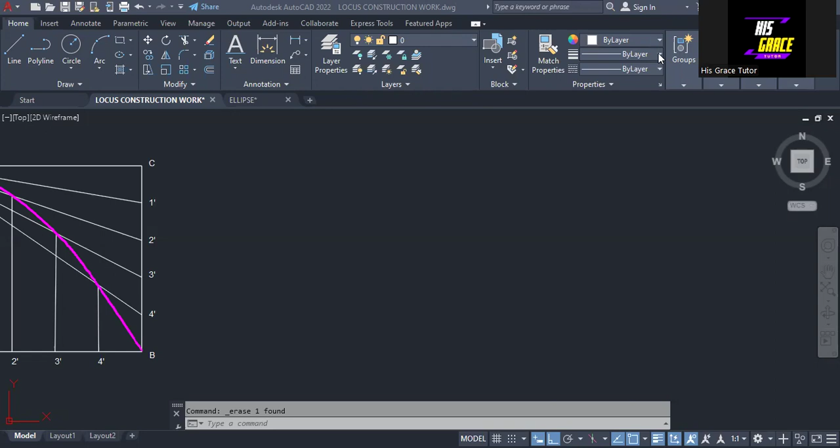The question says line AB is 140 millimeters. C is the bisecting point on line AB. At C, construct angle DCB equals 120 degrees, where point D is 70 millimeters from C. Join point D and point B together using a parabolic curve. So that is what the question says.

So we are going to work that out right now. The first thing we are going to do is draw a horizontal line 140 millimeters as AB. You just need to click on line, or type line on the command line, then press enter. So I'll just type line on the keyboard, then enter.

So what you need to do now is specify the first point as instructed on the command line. I'll click here, then type 140, then enter. So that's the line. We are going to label this line as line AB.

But before we go on, I want to locate the midpoint, since we are told that point C is the midpoint of line AB. So let's locate the midpoint. I will repeat line, so then I can get this midpoint now.

So I just draw a short line here, and then I will label point C. I'm going to be labeling the point, so I will copy from here. Select B, or C, whichever one you like, then copy selection. I will come here now.

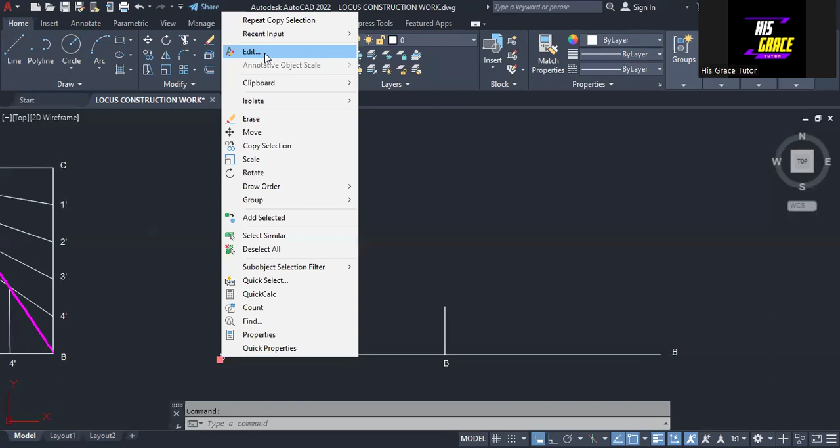So I'm going to change this to the right letters. Here is letter A. So we have B there. I just need to change this one to letter C. So that's the midpoint, and we have labeled the line.

Next we are going to draw a line CD, which should be 70 millimeters. Remember that line AC and BC are each equal to 70 millimeters, because we divided line AB, which is 140 millimeters, into two equal parts, as we located point C as the midpoint of line AB.

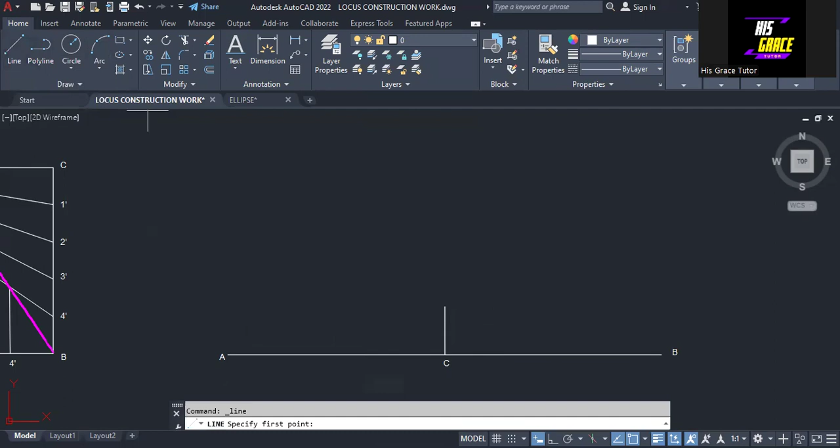For line CD now, I will select line, then click on this point. I'm going to get angle 120, so just look at the angle that we have here. This angle is 120 degrees.

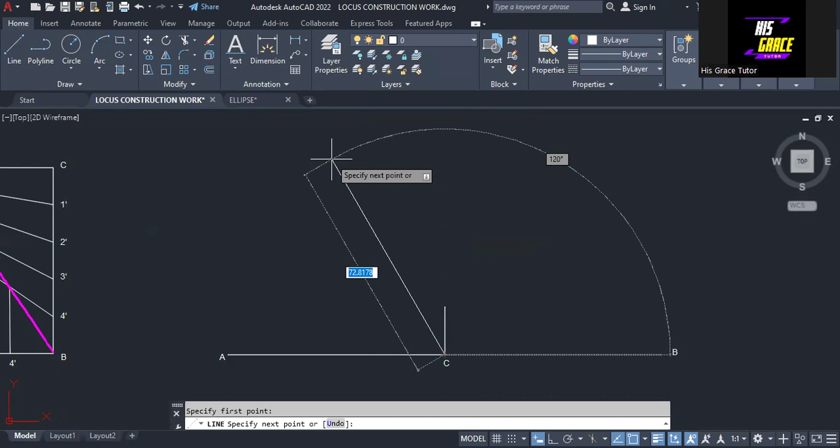I will enter 70 millimeters for the length of the line. So this is 70, enter. That's the length of the line. I can remove this line, I don't need it, so I'll erase it.

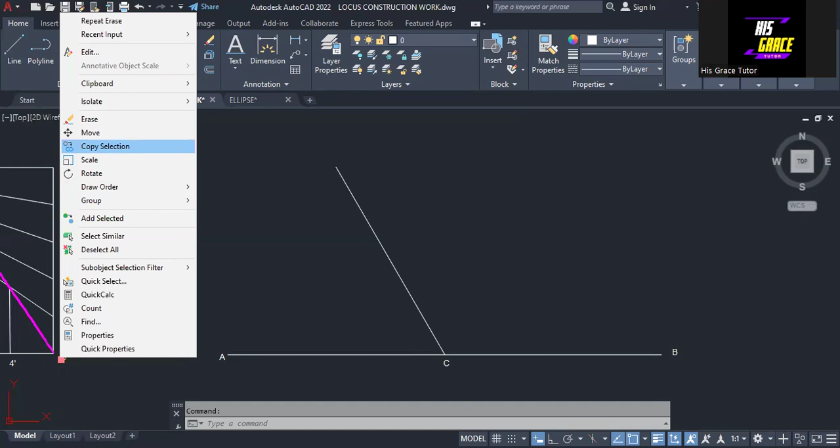Next I'm going to label this point. I will copy this, and take it from here to this point. This point is going to be point D. I'm going to edit it, so this is point D, that's it.

Okay, so we have it there, so I don't need this, so I will erase it.

Next, I want to divide this line CD and BC into a number of equal parts. It's my decision, so I will divide into 7 equal parts. If you decide, you can divide into 5 equal parts, but do not divide it less than 5.

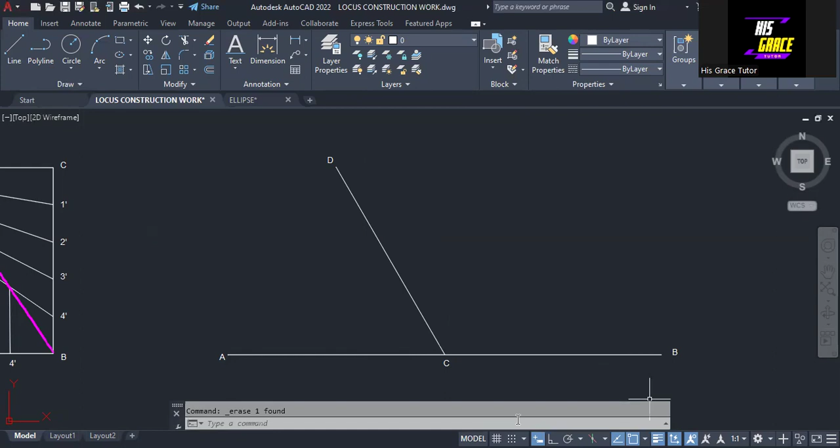But I need to be careful, because if I try to divide this line BC into a number of equal parts, it's going to affect line AC since it's a straight line. So what I'm going to do now is remove this line from here to here, that is line AC. I'm going to remove it.

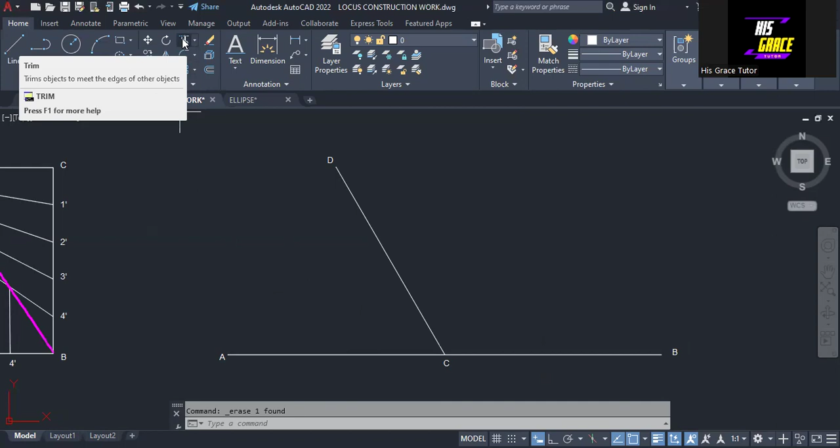All I need to do is come here and select this tool, which is trim. Then we trim it, so that one is gone. We will still bring it back by the time we want to complete this work.

Next, I'm going to divide BC and CD into a number of equal parts. I want to divide into 7 equal parts. I will come here on draw and select this tool, divide. Then I will select the line that I want to divide as I'm told to do, then I will enter 7, then click enter on the keyboard.

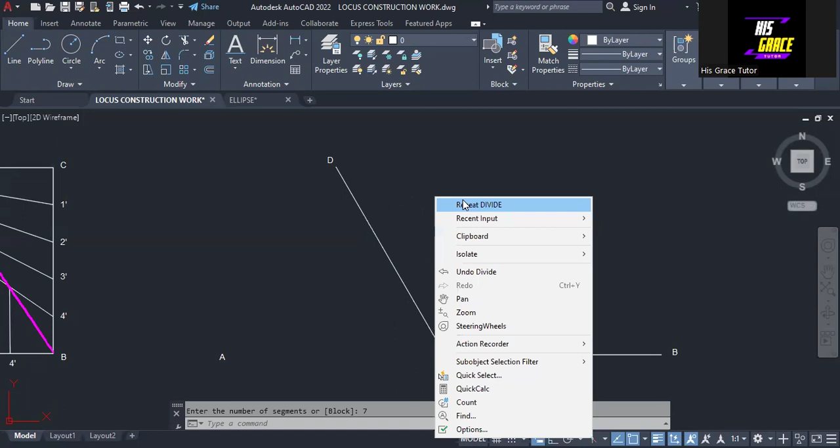It's already divided, so I'm going to repeat it for BC. I will select the line as I'm being told, then press 7, then enter. So the line is already divided into 7 equal parts.

Though we cannot see the point of division, they are all there as we've seen in the previous video. Next, I'm not going to number the points yet, but I want to draw the line first. After that, I will number the points. Let's quickly do that.

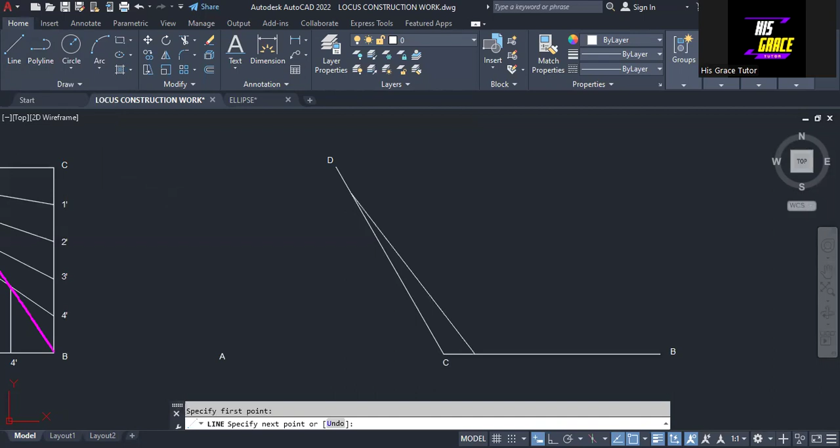Next we select line, then from the first point here, this is the first point, so we are joining this point together with this point here. Once you have the point, it will show. I will repeat the line then.

We have a point here again, then another point here, and we join like that. Just follow it, when I number you'll see what I've done. Then we have another point here, joined together with another point here.

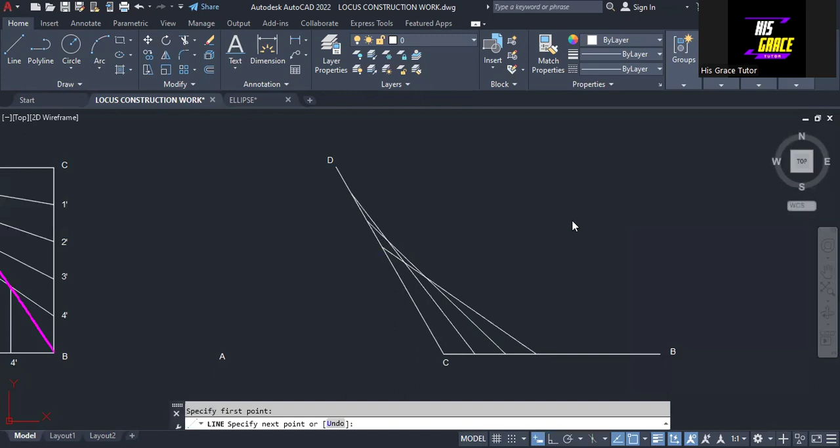We repeat the line again, have another point here, join together with a point here. We repeat again, have another point here, join together, there's a point here. Then we repeat, just right click and select repeat line. Then we have another point here. That's it, we have all the points there.

I'm going to number the points. I'm not going to draw the curve without numbering the points first. That is what I'm going to do right now.

I'm going to select this, then I will copy selection, so we move it.

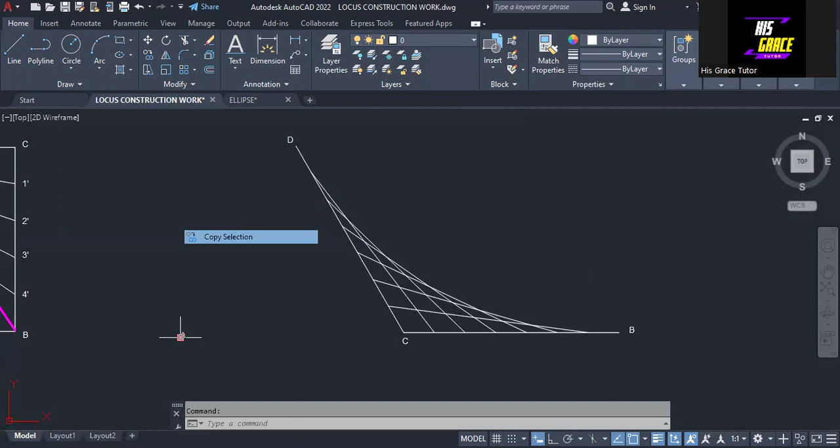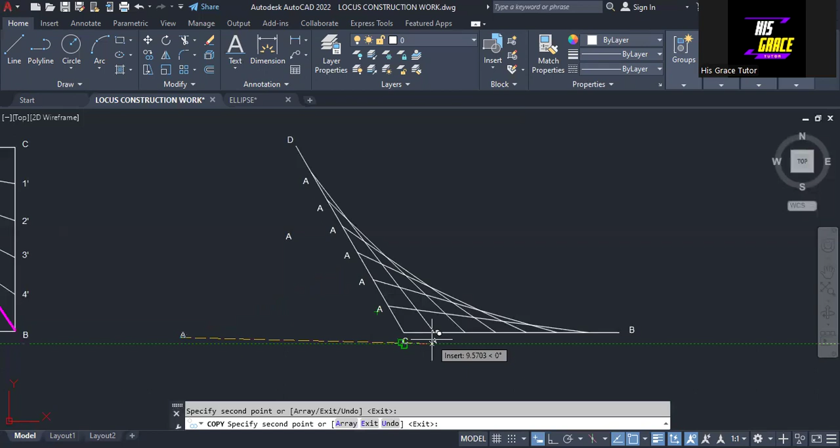So maybe there is a point here, there is another point here, we have another point here, another point here, one here, another point here. Then I will come here, we have a point here, a point here, another point here, another point here, and we have another point here, another point at this end.

Okay, so we have all the points. I'm going to change all this to numbers.

And you'll see I'm going to number this. I just want to erase this. Now, so we edit, just select it and edit.

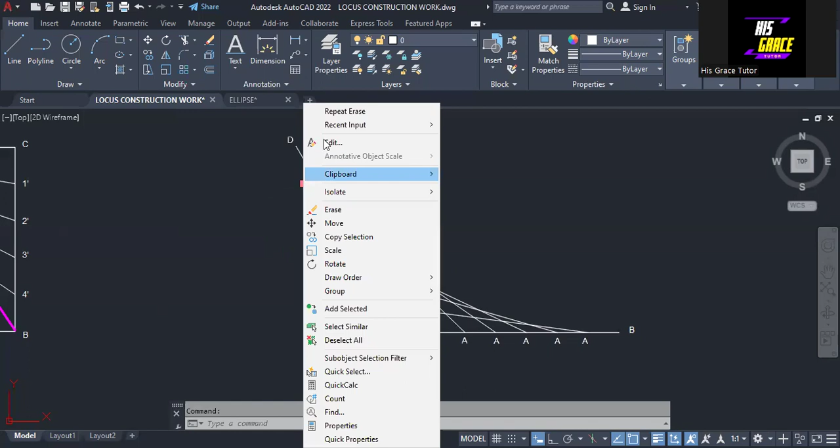So this is going to be, okay, let me count: 1, 2, 3, 4, 5, 6. So I'm going to make this 6.

Okay, so then I will select this and then I will edit it. So this is going to be 5.

Then select this, so edit it, so this is 4. Then this is 3.

So this is 2, not 3, 2. And then this is 1. So in this case, when I come here, I'm going to change the numbering in the sense that we are going to have this 1. So this is going to be 1, I'll call it 1 prime. So 1 to 1, they're not in the same line. So we alternate the numbering.

I'll just leave it like that for this. So we edit this, this is 2. Then this is 3. So here is 4. So here is 5. So here is 6, okay, so that's it.

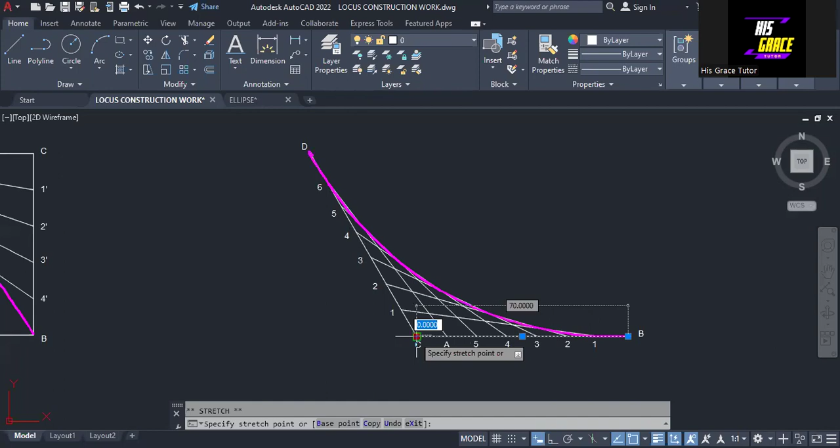But let us also show this line AC. So I will stretch this, and the distance is 70. Then I'm going to bring the letter back. So that is letter...

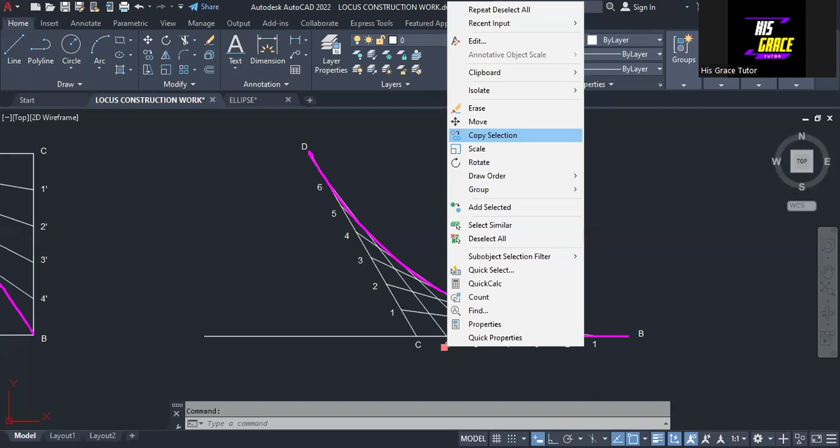Okay, this didn't change, so I will still make use of it, and then I will come back and change it. So I will just move this one. Okay, so bring it here for us to have it here. Then I'm going to edit this, okay, so that is 6.

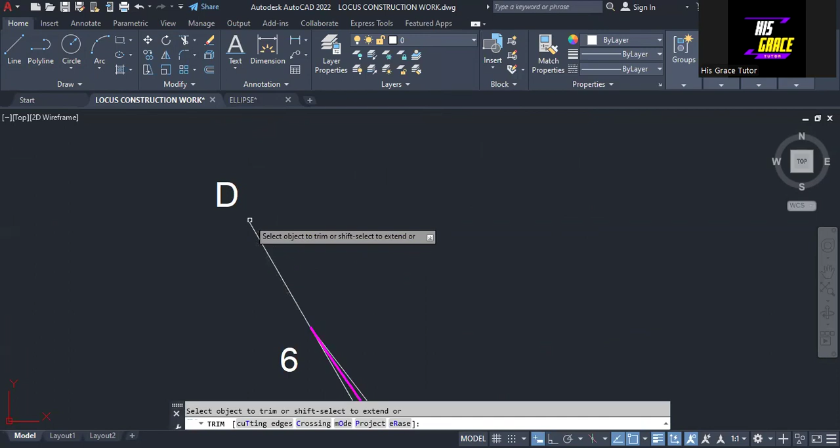I'll just stretch it to this point. All right, so that's it. So we deselect it, so we have perfected the work now.

So this is the parabolic curve that we asked to produce to join point B and D together, as simple as I've done it here. Thank you and God bless you.